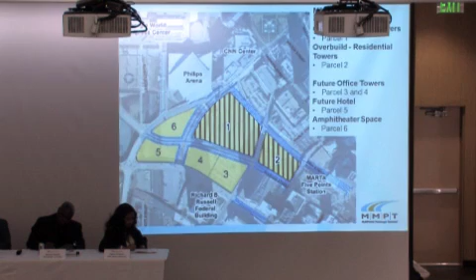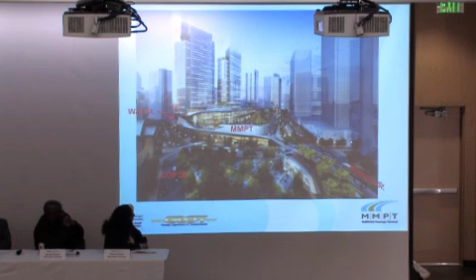An artist rendition of the MMPT itself, facing east, looking from Phillips Arena. You can see Wall Street and Alabama Street will be reconstructed to be on viaduct level, bridged all the way over to Centennial Olympic Park, providing greater connectivity from the park over to Spring Street. The Gulch itself today provides a great disconnect and little means of getting from one side to the other unless you really know what you're doing. I wouldn't advise trying to cross there.

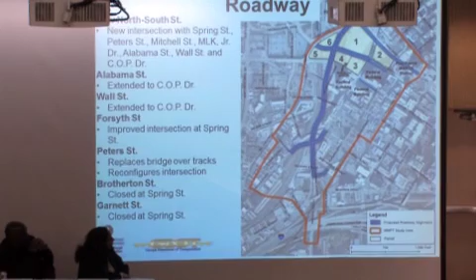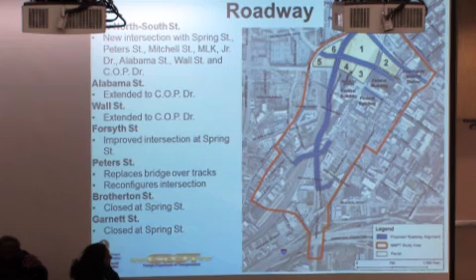As I mentioned, with our roadway network, we are going to bring Wall Street and Alabama Street up to grade on viaduct level. We're also going to construct a new roadway running north and south, which we call New North-South. The roadway network will help create better ingress and egress in and out of the area, and also allow us to create better blocks, which creates better economic viability for development.

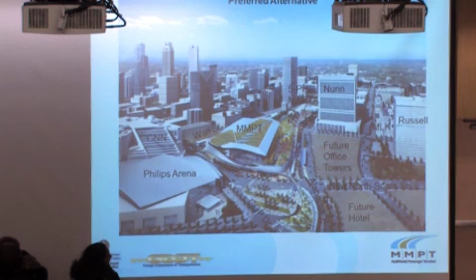This is a shot of an artist's rendition of the Gulch itself, of the MMPT once it's constructed, and what it looked like prior to any future development. You can see the MMPT itself has a green roof and parking. The park to the lower center of the screen is ADA accessible. You can walk from Phillips Arena all the way over to the 5 Points MARTA station and land at Underground Atlanta without ever having to physically cross one of the roadways.

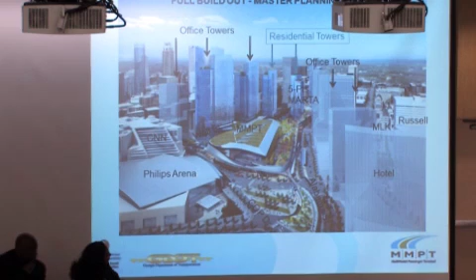With full build out, expected from our market research that FIC our developer has worked on, the development that could occur would include several office towers, residential towers, and a new convention center hotel. We've also been in talks with GSA, who has over 4 million square feet of leased space outside the area; they would love to build a government center, so to speak, within the area also.

With this project also, I guess you can call it the water feature that we build in there. It's a public amenity, but it will help with the flooding problems that currently occur over in Vine City and English Avenue area. We can store and hold the water here and slowly release it downstream, and it will help us with the flooding issue. And there you can also see the just over 4-acre park that's going to be on the roof of the MMPT.

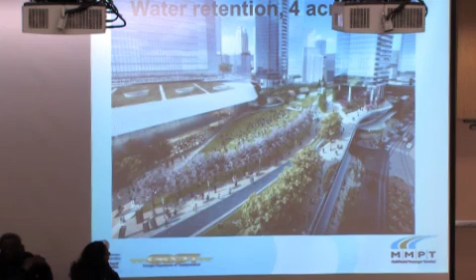So thank you, Derek. And to kick off our first question, we'll just go down the line here, easy one. What's your involvement in the project, and then why do you feel that the MMPT is important?

Yeah, hello, my name is Heather Alhadeff. Hello, there we go, thank you. My name is Heather Alhadeff. I work for Center Forward, but in my previous life, I've been in the public sector.

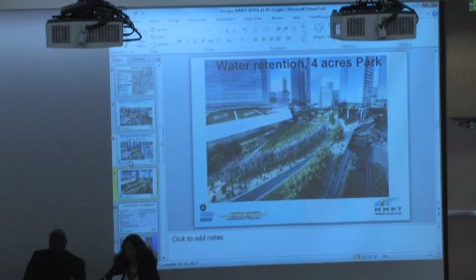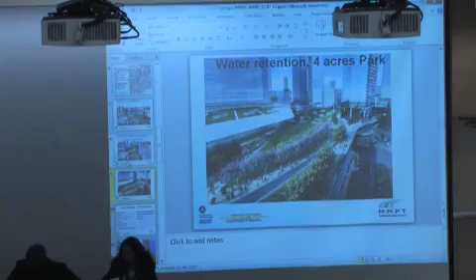That's restaurants and shops that are based on local residents buying things at night too. I think the key message is it must be beyond tourist-based, special-event-day retail, and that's what a lot of people have continuously brought up, the need to fill that void, which will help with having purpose and reason to go there. But the urban design, again, making sure that things like glass at the street level are in place, so you can feel like you're being seen, and it's safe and comfortable.

And plus, people like to people-watch and be where people are. So if they can see the folks and see the activity, that'll help a lot. But I think the key message from a planning perspective is that it has to be not just special-event or daytime-serving retail.

One of the points that the master developer made when we were selecting this particular design was to have that street life, and also if you've got retail on both sides of the street, it tends to work better. So that was one of the factors in consideration when we sited the MMPT where it is.

One of the things we also begin to look at, both then and now, is the importance of your other major neighbors or big drivers. Case in point, you don't go and hang out at the Georgia World Congress Center unless there's an event there. You don't take a walk through it. You don't say, let's go to the Georgia World Congress Center and do something. You have to be able to transform those things.

You see where there are some things, whether it's elements around Centennial Olympic Park, around Stats, or even on the other side, some moments to the west of Northside Drive. What's really great about the project we're talking about tonight is its ability to be part of the connective tissue, to get people walking where they can be safe and moving back and forth.